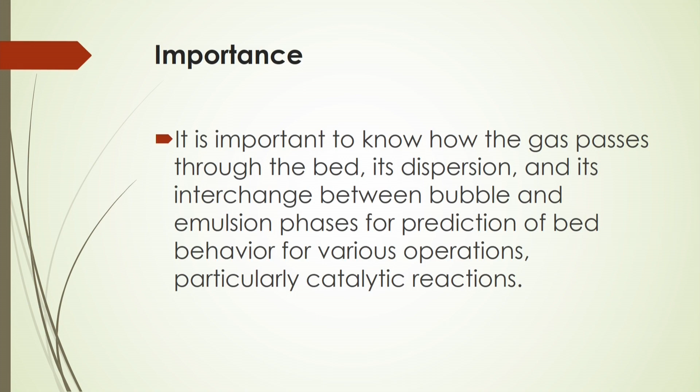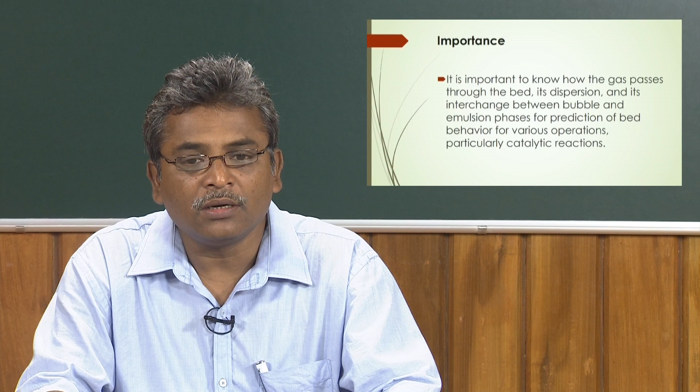So, as gas passes through the bed, its dispersion and its interchange between the bubble and emulsion phases need to be known for predicting bed behavior for various operations, and for the analysis of various catalytic reactions and other selectivity processes.

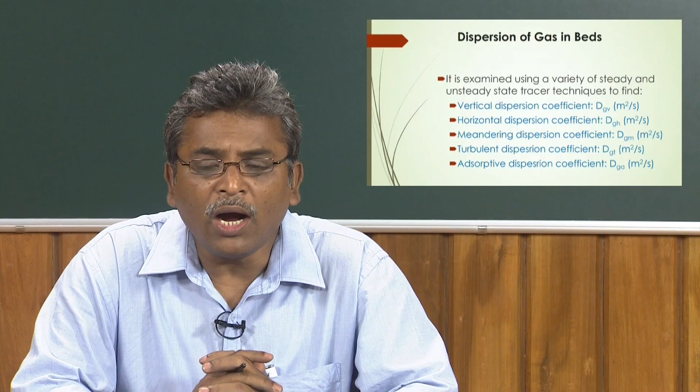Now, whenever we talk about the dispersion of gas in beds, we have to quantify how much dispersion of the gas happens for particular operating conditions. How to estimate that dispersion extent, or you can say the intensity of the dispersion of gas in the bed.

There are different parameters, or rather one parameter divided into different ways to describe gas dispersion. When gas moves straight upward, this dispersion phenomenon is described or quantified by the vertical dispersion coefficient, denoted by dGV in the slides.

And when gas is horizontally dispersing in the fluidized bed due to certain energy distribution, the dispersion coefficient measured for that extent is described by the parameter dGH. Here H denotes horizontal and V denotes vertical.

Also, when there is no other convection inside the bed, or convection effect radially, whenever fluid is flowing through the fluidized bed, there will be a meandering dispersion of the gas inside the bed. This means at the axial location there will be a certain extent of dispersion compared to other parts of the fluidized bed, provided there is no disturbance or other action acting during the flow of that gas.

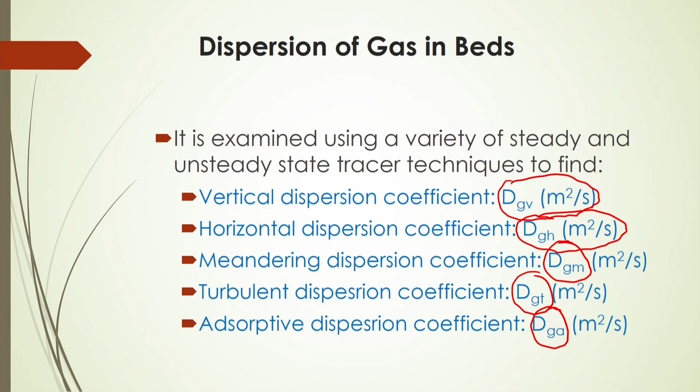Now, that adsorption dispersion will be characterized by the adsorptive dispersion coefficient, denoted by dGA, where A is for adsorption and G is for gas, and capital D represents the dispersion coefficient. So we will examine how vertical, horizontal, meandering, turbulent and adsorptive dispersion coefficients occur inside the bed, and how it can be quantified. This will be discussed in the lecture here.

Now, what is the technical way, or experimental method, by which you can actually quantify or estimate the gas dispersion inside the bed? You will see there are several methods to quantify this dispersion effect inside the bed.

As already discussed in previous lectures, there are tracer techniques by which you can estimate the dispersion phenomena inside the bed. Now, by running steady state gas tracer experiments, what you have to do is use some amount of tracer gas which will not actually take part in the reaction in the bed, and if it is not adsorbed to some extent, then that will be a non-adsorptive condition.

So basically, whenever you are sending any gas which is not reactive with the existing gas being supplied, and if it is used as a tracer gas, then how this tracer gas changes its concentration along the axis at a certain operating condition. Now, if you are measuring this concentration change of that tracer gas with respect to time, then it will be called unsteady state operation.

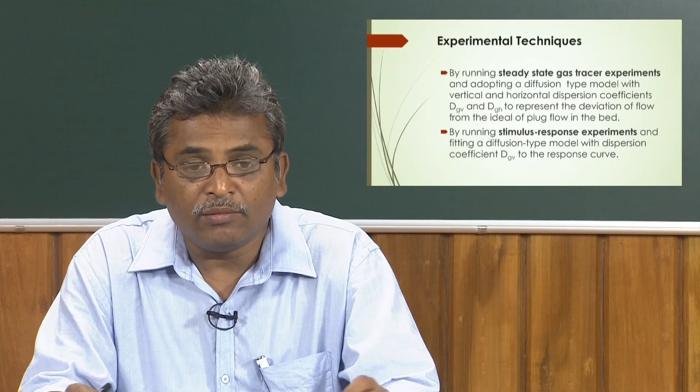So at unsteady state, if you measure the tracer concentration with certain measuring devices and see how it changes with respect to time, and then feed this tracer concentration profile with respect to time into the experimental data, you will see how the dispersion coefficient can be measured or estimated. You have to feed this experimental data of the concentration profile into some fundamental models, and from that model you will be able to calculate the efficiency, or intensity, of the dispersion of gas inside the bed.

Now, steady state gas tracer experiments are more common for estimating this dispersion coefficient in the bed. For this, you have to feed some fundamental model with the experimental data of the tracer gas concentration profile with respect to time. What is that fundamental model? It is actually called the diffusion type model.

This diffusion type model is given in detail in reaction engineering books, in chemical reaction engineering books by Levenspiel, which will be more helpful to study in that way. But we will still see here how to estimate it using the diffusion type model and how it can be utilized to calculate the dispersion coefficient. This diffusion type model uses vertical and horizontal dispersion coefficients, dGV and dGH respectively, to represent the deviation of flow from the ideal plug flow in the bed.

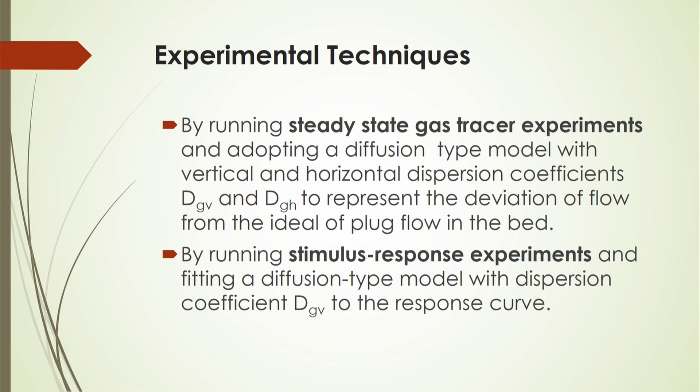So this is one method. Another important method is by running stimulus response experiments and fitting a diffusion type model, which will also give you the extent of dispersion of the gas vertically or horizontally from the response of that stimulus response experiment. Another important method is by injecting tracer bubbles into the bubbling fluidized bed.

You will see this at incipiently fluidized condition, and if there is a loss of tracer from these bubbles, and if you estimate that loss of tracer from the bubbles and find the interchange coefficient of this loss of tracer gas from the bubble to the emulsion gas, then you will be able to calculate the extent of dispersion happening inside the bed.

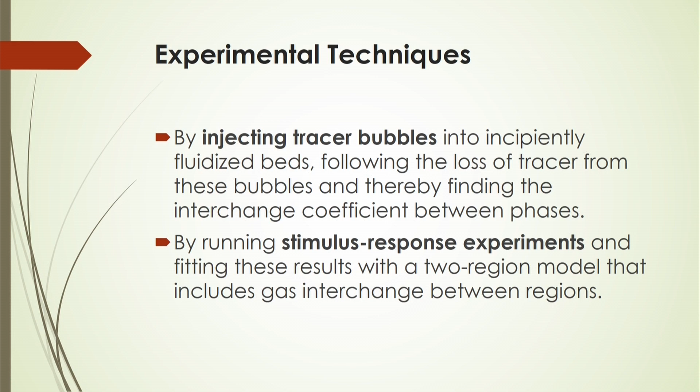Another important method is by injecting some other particle, like a tagged particle, inside the bed, and then tracking how the tagged particle's height changes with respect to gaseous flow from one location to another. Sometimes radioactive tracer particles are also used to calculate the dispersion coefficient or dispersion phenomena inside the bed. In that case, one particle moves from one position to another, and from its mean travel path and time-averaged mean travel path, the dispersion coefficient can be analyzed.

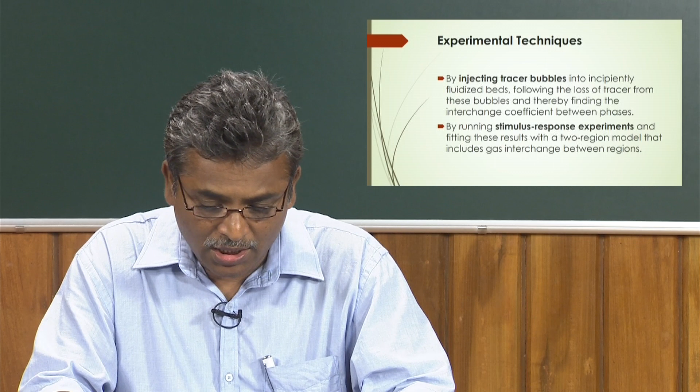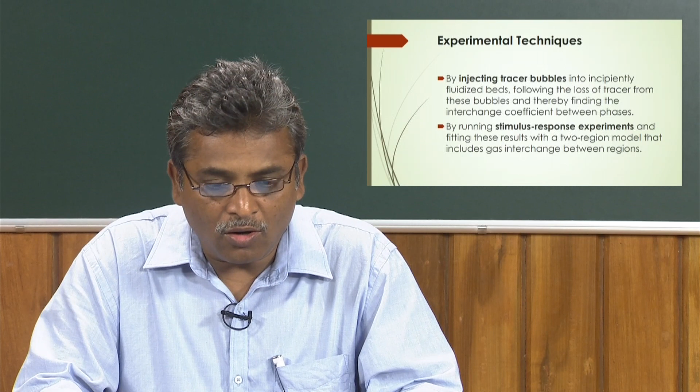Recently, another important aspect is knowing the conductivity of the tracer gases inside the bed using devices like a conductivity meter, measured at different locations of the fluidized bed with respect to time. From the information entropy of the change in concentration of the tracer gas inside the bed, you can calculate the maximum mixedness of the phases inside the bed, and from this you can determine the extent of mixing or dispersion of gases happening inside the bed.

Now let us see one important steady state tracer technique. In this figure we describe a fluidized bed. From the bottom, gas is moving upward, and from the top a tracer gas is allowed in and allowed to mix inside the bed at that particular gas flow rate, with certain gas particles and fluidized particles there.

In this case, you will see the flow of tracer gas at a horizontal plane in the tall fluidized bed, measuring the upstream diffusion of that tracer, from which you will be able to calculate the extent of mixing.

Here, Ca represents the mean concentration of tracer at level Z inside the bed, and Cai is the concentration at the injection plane Zi. This is the Zi at which the tracer concentration is actually noted down. So if Ci is the concentration at the injection plane Zi, when represented by the dispersion model, the differential equation for this vertical dispersion process is represented by equation 1.

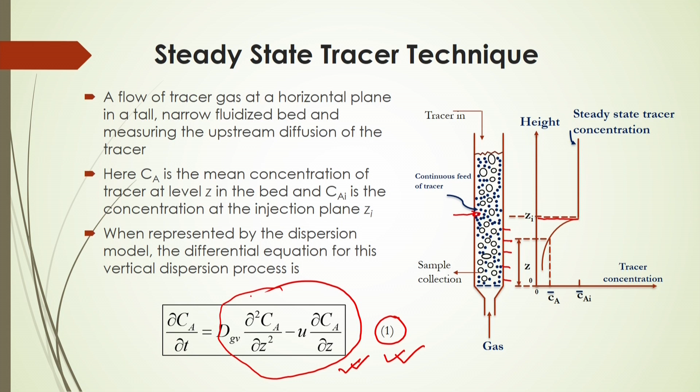Now see here: at steady state of tracer gas at a horizontal plane in a tall narrow fluidized bed, measuring the upstream diffusion of the tracer at different locations, the differential equation for the change of concentration with respect to Z in the vertical direction can be represented by equation 2 at steady state condition.

If you solve equation 2 with a reasonable boundary condition, you will get equation 3, which represents the average concentration at different axial locations.

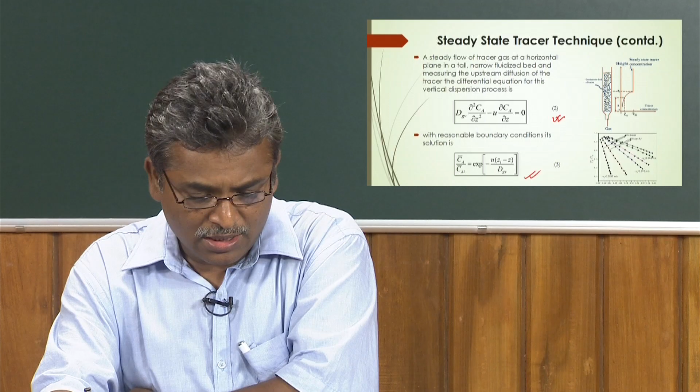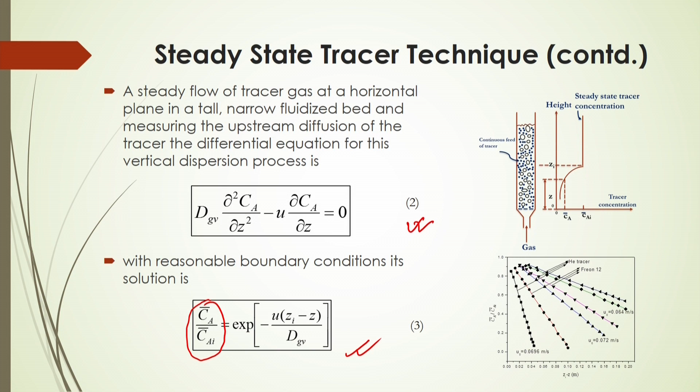So Ca bar by Cai equals the exponent of minus u times (Zi minus Z) divided by Dgv. If you plot this concentration data, taking the ratio of Ca bar by Cai and the logarithm on each hand of this equation, you will see a straight line formation, from which you can calculate Dgv from the slope of this equation.

From observation, Kunii and Levenspiel gave results from their experimental observation for vertical dispersion coefficient. This dispersion coefficient is seen to vary with respect to u, meaning whenever you increase the gas velocity inside the bed, the dispersion coefficient will increase.

It is seen that for different particle sizes, Dgv also changes, meaning this vertical dispersion coefficient is a function of particle diameter. They did their experiments with different tracer particles and different particle types, using freon gas or helium gas as the tracer gas.

When using helium gas with particle diameter of 150 micrometers, they got this profile, showing that the dispersion coefficient in the vertical direction increases with increasing gas velocity. But when the same helium concentration is used with particle size reduced to 60 micrometers, they got a higher dispersion coefficient compared to the 150 micrometer particle diameter.

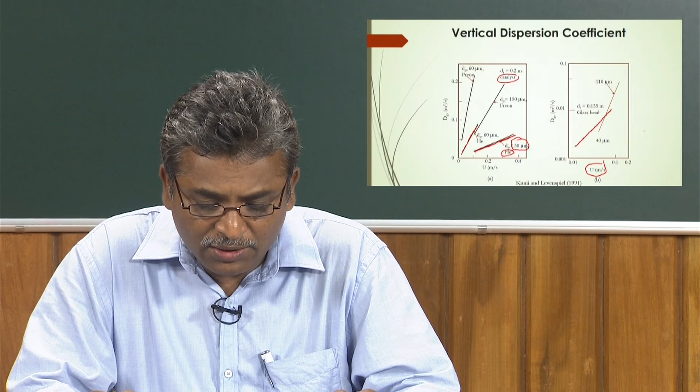It is also important to note that the tube diameter, or bed diameter, of the fluidized bed also has an intense effect on the fluidized bed gas dispersion. What happens if we increase the tube diameter? Suppose if I use 0.2 meter instead of 0.135 meter, it is seen that for the same tracer gas and same type of particles, the dispersion will increase.

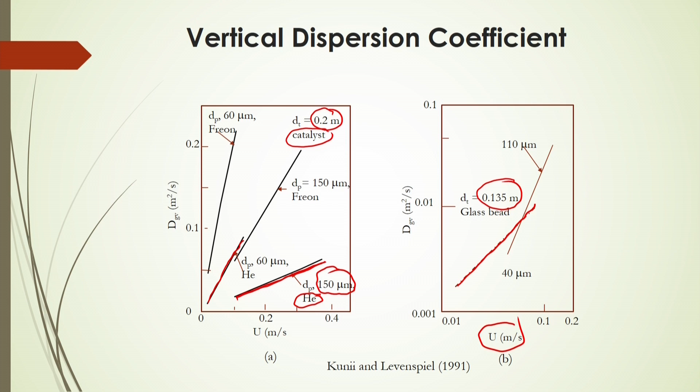Why? Because for the larger diameter bed, there will be more space, so the radial distribution of the gaseous particles as well as solid particles will be more relative to the smaller diameter tube. There, more internal circulation, that is the intercirculation cell of solid particles, will be more compared to the narrow tube. So residence time will also be more, because of which the dispersion coefficient of gaseous particles inside the bed will increase.

Another important concept is the horizontal dispersion coefficient. What is the horizontal dispersion coefficient? That means you will see that near the distributor, the gas will not immediately go to the upper position of the fluidized bed.

Very near to the distributor, high kinetic energy distribution will enhance the distribution not only in the vertical direction, but there may also be a tendency for solid particles or gaseous particles to move radially or laterally in the bed.

Also, if the bed diameter is high, then from the bottom part of the fluidized bed near the distributor, due to higher kinetic energy, ejection of solid particles may change the axial velocity profile of the gas toward the radial position. So radially there will be a spread of solid particles or gaseous particles, by which horizontal dispersion may result from the high kinetic energy distribution at the bottom side near the distributor.

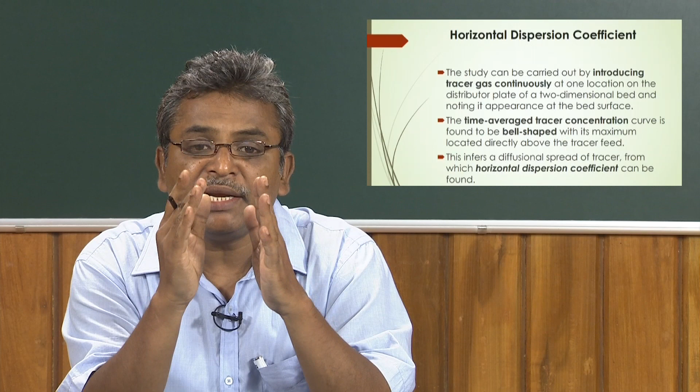Whereas at the top side, you will see there may be a reduction of lateral dispersion, because the very fine particles coming up due to entrainment and segregation phenomena may not move downward and spread radially as intensely as in the lower part. In that case, the kinetic energy or streamline of particles coming out from the bubble position, that is the bubble head, may not eject as much solid from outside, but will move up horizontally because of those finer particles.

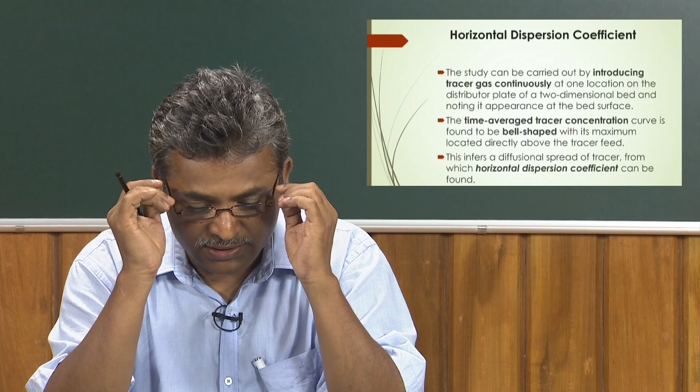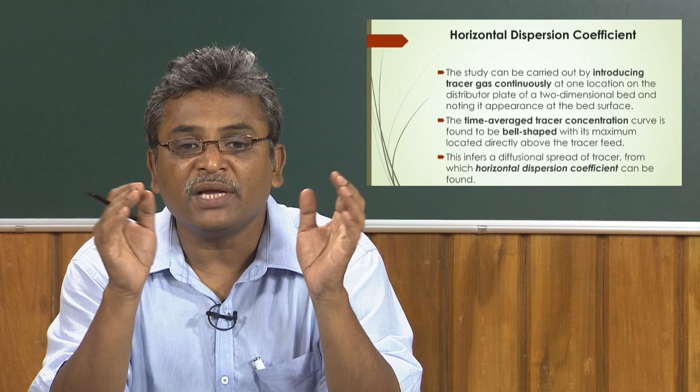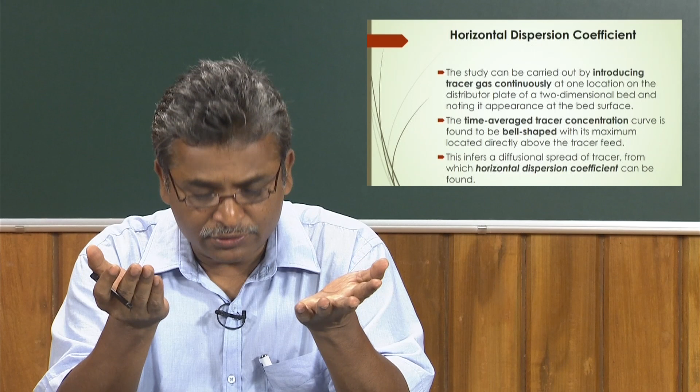So, if there is a mixture of larger and smaller particles, there may be a tendency for the coarser particles to come out downward at the upper position. They may change the velocity pattern of the gas flow rate at the top position, and because of this the dispersion of the gases will change its trends.

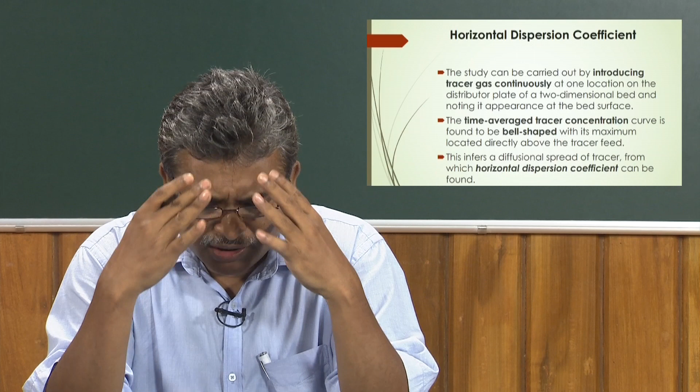Another important factor: whenever we measure or estimate the horizontal dispersion coefficient, we introduce the tracer gas continuously in the bed at one location on the distributor plate of a two-dimensional bed, and note its appearance at the bed surface. The time-averaged tracer concentration curve is found, with a maximum located directly above the tracer feed, and the time-averaged tracer concentration looks like a bell-shaped trend. This interprets the diffusional spread of the tracer, from which you can determine the horizontal dispersion coefficient.

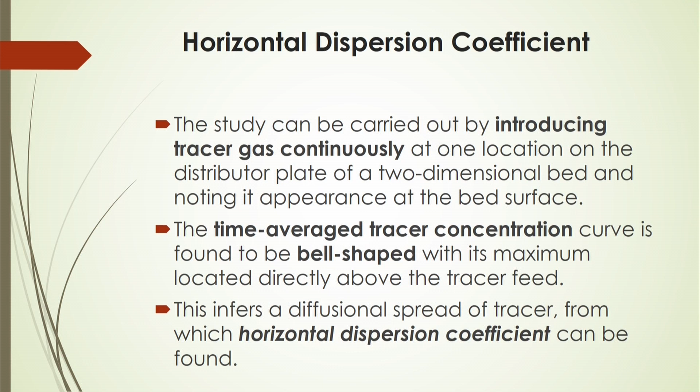Some results given by Kunii and Levenspiel for horizontal dispersion coefficient used horizontal tube arrays for enhancing this dispersion coefficient, and they measured the quantity of the dispersion coefficient. They found that with increasing gas velocity, initially up to 0.02 meter per second, the horizontal dispersion coefficient does not change significantly, whereas above 0.02 meter per second the dispersion coefficient changes drastically for different air and tracer gas mixtures.

It is seen that for freon tracer the molecular diffusivity is a little lower than the convective diffusion, whereas for the helium tracer the molecular diffusion is much higher than the convective one. So in this case, it depends on the physical properties of the tracer gas, and also whether there are any adsorption characteristics inside the bed.

Another important point: if you increase the gas velocity for a fixed bed with no fluidization condition, there will be no significant change in horizontal dispersion coefficient. Whereas beyond 0.25 meter per second effective gas velocity inside the bed, there will be a change in horizontal dispersion coefficient, and this horizontal dispersion coefficient actually changes as per the particle diameter.

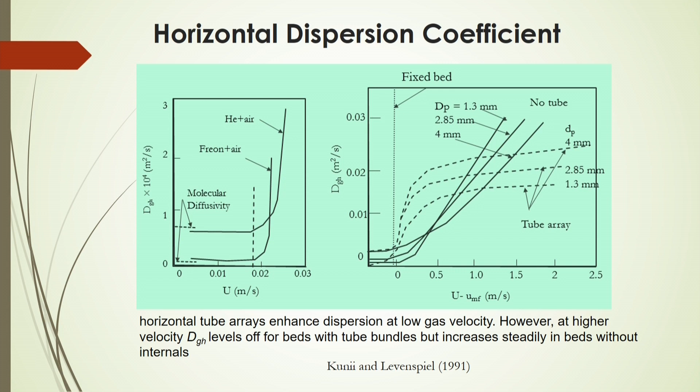So you cannot express this haphazard behavior of concentration change by a standard, simple diffusion theory. So for this, some phenomena need to be introduced to explain how this type of behavior can occur.

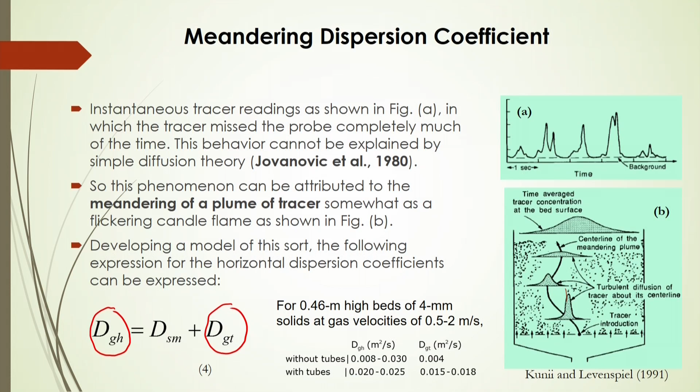In the absence of bed internals, the meandering plume is the main mechanism for horizontal spread of gas. You can reduce that horizontal spread of gas by inserting some tube vertically, or you can use a baffle, or some other provision, so that you can decrease the horizontal dispersion coefficient.

We have already discussed something about making a shroud, by which you can decrease the attrition mechanism, and in the same way you can also reduce the horizontal dispersion coefficient in the bed.

In the bed with tube bundles, actual turbulent mixing will be dominant, because there will be some interaction of the solid particles in presence of the tube bundles that will enhance it.

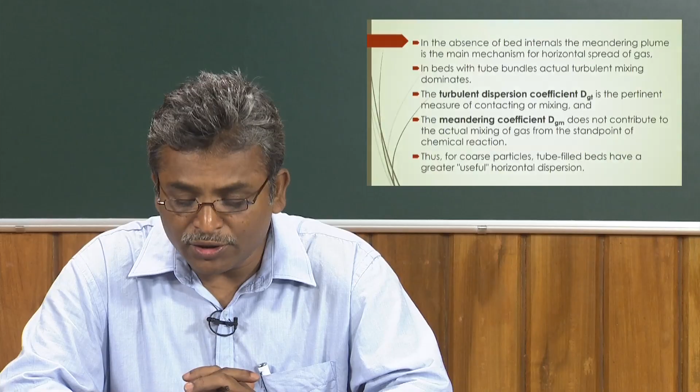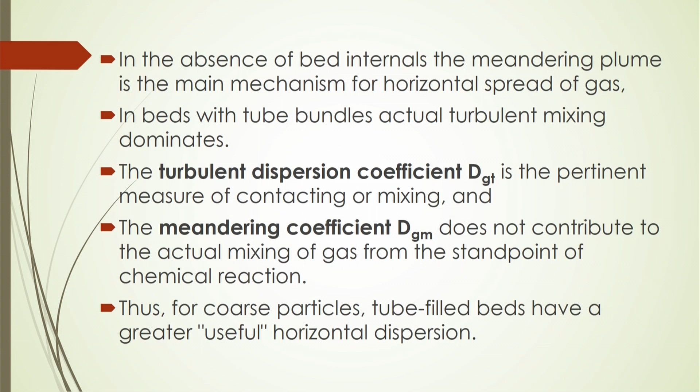The turbulent dispersion coefficient DGT is the pertinent measure of the contacting or mixing inside the bed, whereas this meandering coefficient will not contribute much to the actual mixing of the gas from the standpoint of chemical reaction. Thus, for higher diameter particles, tube-filled beds have greater useful horizontal dispersion in the bed.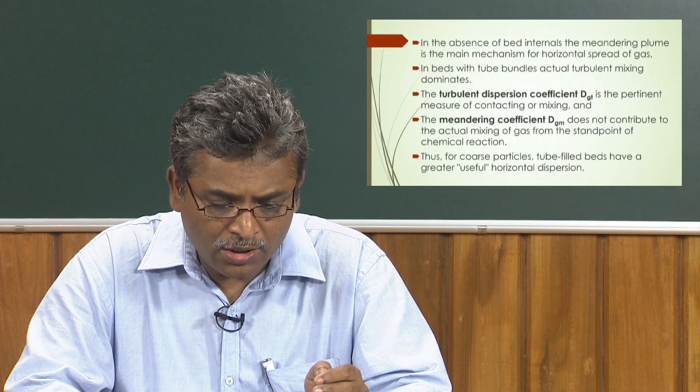There are different methods of estimation of gas dispersion that we told about. So, we have discussed one method, and then another method is called the stimulus response method of gas dispersion.

The stimulus response technique has been used extensively to explore the flow behavior of the gas in the fluidized bed. Here in this figure you see that sometimes the tracer is introduced inside the bed as a pulse input and as a step input.

As a pulse input, within as short a period of time as possible, you have to insert the tracer gas in the bed, and immediately you have to collect the sample, or by online measurement you can measure how the concentration of the tracer gas will change with respect to time.

Once you know the concentration of the tracer gas with respect to time, you may expect this type of profile, shown here in this figure.

Also for step input, what happens is you have to insert the tracer gas within a certain interval of time continuously in the bed, and you will see this type of trace - the distribution function of the tracer inside the bed observed with respect to time.

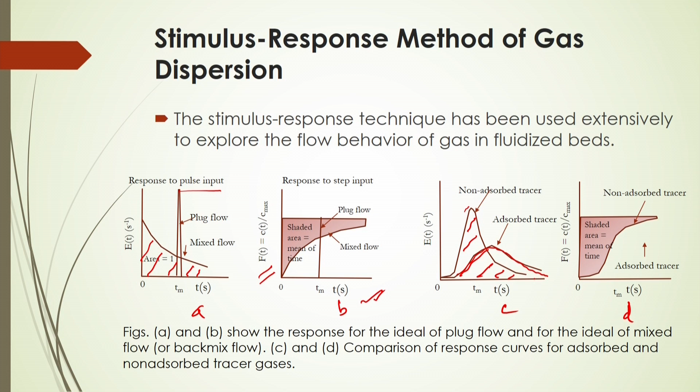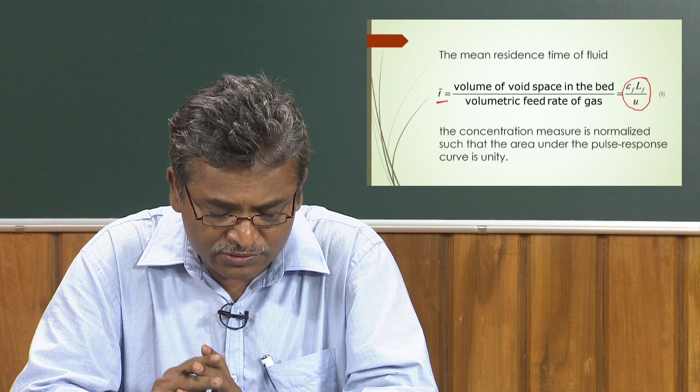So the concentration measure is normalized to represent the profile or distribution of the tracer concentration with respect to time. After measurements, when you plot it, you get a profile like this, and you can measure the area under that curve from the graph, or calculate it theoretically using the one-third rule or other integration techniques. Once you know the area under the curve, you can calculate the mean residence time in the bed.

Now, what is the relationship between ET and FT? ET is the concentration function here, the normalized concentration function. These normalized curves are called the ET curve for the pulse response and the FT curve for the step response. At any time after introduction of the tracer, ET and FT are interrelated by this equation: dFT by dt equals ET, or the integration of ET from 0 to t.

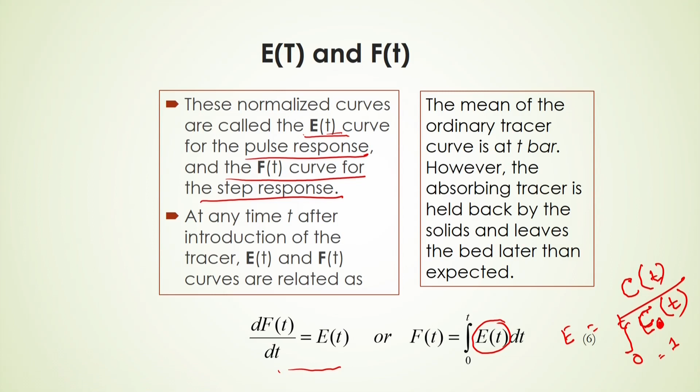Once you know the ET curve, observing that trend, and fitting it with the experimental data using the standard diffusion model, you will be able to calculate the dispersion coefficient.

Now, if the extent of adsorption is represented by an equilibrium constant, and if you use some tracer gas that is being adsorbed by the particles used in the fluidized bed, then you have to consider those adsorption phenomena also. At equilibrium condition, the equilibrium parameter for that adsorbed gas inside the bed is represented by m. M is defined as the concentration of tracer in the solid divided by the concentration of tracer in the gas, by this equation 7.

Then for a bed of adsorbing solids, T bar, the mean residence time, will be less than or equal to the measured T, which will be less than or equal to 1 plus m into T bar. What does this mean? Whenever adsorption is present, there will be more time for dispersion of the gas inside the bed.

Also, if equilibrium is rapidly established, then the measured mean residence time will be equal to the adsorbed phase mean residence time. This happens because when equilibrium is rapid, it will not take much time to adsorb the gas, while dispersion takes more time. So the adsorption contact time becomes relatively very small compared to the total mean residence time or average residence time inside the bed.

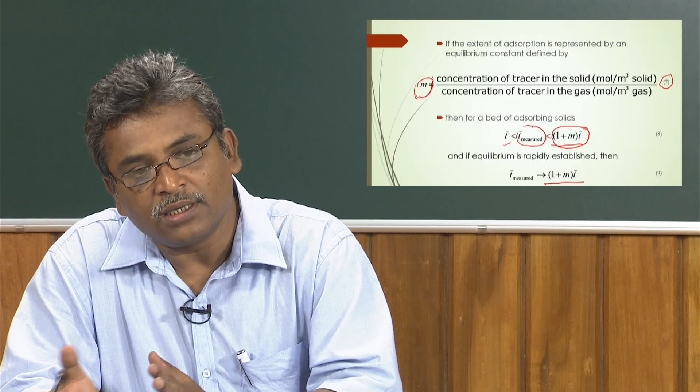If the adsorption takes place within a very short residence time, or very rapidly, if equilibrium of the adsorption happens, then the measured mean residence time will be exactly that mean residence time for the adsorption condition.

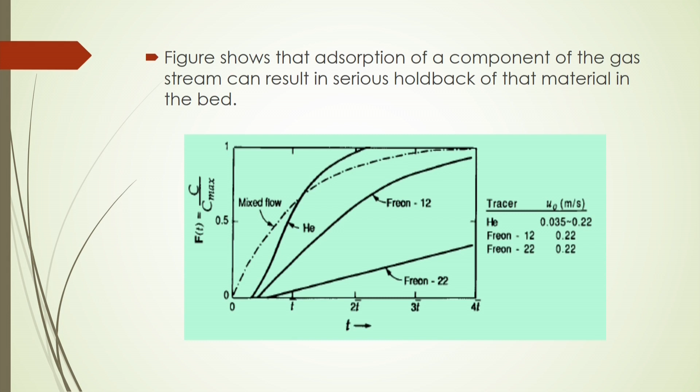Now, the one dimensional diffusion type model very often reasonably represents the flow characteristics of the fluid inside a unit of fluid flow. If you are considering one dimensional diffusion model for a fluidized bed that is narrow, with diameter not more than 5 centimeters, you can easily use that one dimensional diffusion model because the radial distribution will not be that much effective compared to the axial dispersion coefficient.

So in that case, the one dimensional diffusion type model reasonably gives good results to represent the dispersion phenomena inside the bed, and this one dimensional model is widely used for calculating or estimating the dispersion coefficient of the fluid medium inside the bed.

So what is that one dimensional dispersion model? This is the final form of the equation, derived from material balance. The material balance details are not given in this lecture, but this final equation you can get in any standard reaction engineering book. I am just giving you two books, Levenspiel and Fogler.

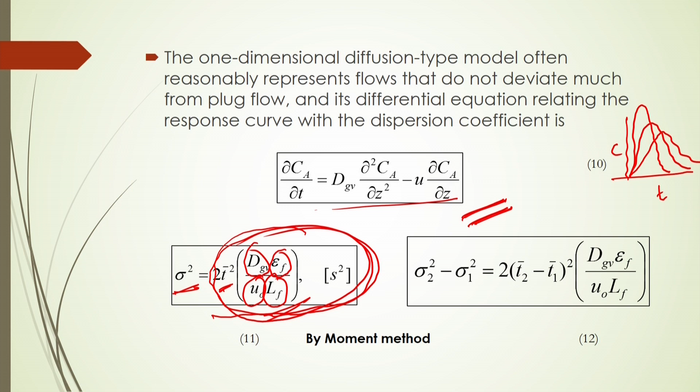What is u0? U0 is the gas velocity at which the fluidized bed is being operated, and T bar is the mean residence time obtained from the first moment of this equation. Sigma square can be calculated from this moment method. Once you know the concentration, you will be able to calculate the variance, and from this variance, the dispersion coefficient can easily be calculated.

Now for gaseous components that can be adsorbed by the bed solids, the vertical dispersion of the tracer gas should also include the material carried about the bed by these solids. An equilibrium existed between gas and solid at all positions in the bed, which gave the following expression to account for adsorbed gases.

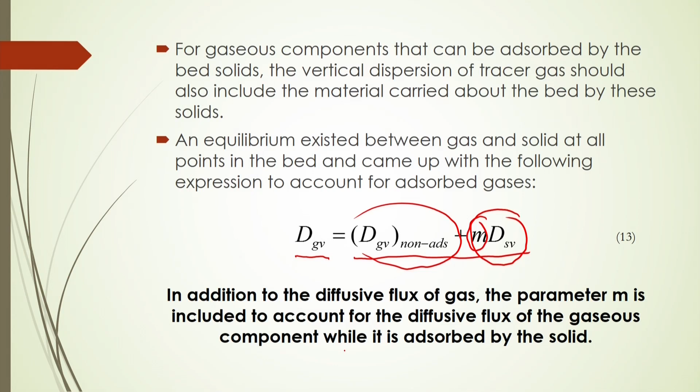So this dGv can be expressed in terms of the dispersion coefficient of the non-adsorbed condition and the dispersion coefficient of the vertical dispersed solids, and if you multiply it by the adsorption equilibrium, you get the vertical dispersion coefficient of gas in the bed. In addition to the diffusive flux of gas, the parameter m is included to account for the diffusive flux of the gaseous component while it is adsorbed by the solid.

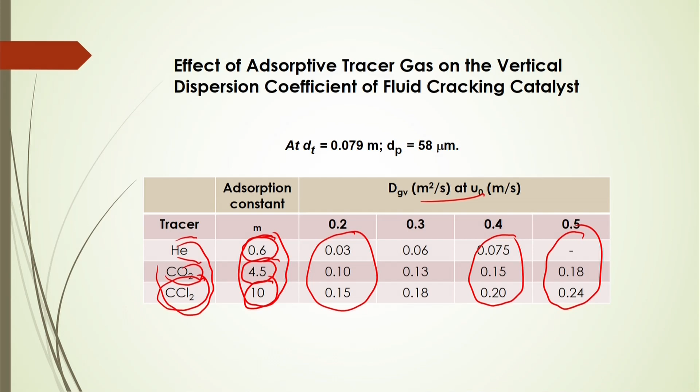So in that way, for different m values you will see how dGV changes, as given in this table. This dGV will change accordingly with respect to the equilibrium parameter of the adsorption of the gas. Now, another important factor is called the gas interchange.

It is seen that for slow cloudless bubbles, gas flows directly from the main body of the emulsion into the bubble and then back again into the emulsion. So in a fast clouded bubble in the bubbling fluidized bed, the tracer exchange occurs between bubble and cloud, and also within the cloud and emulsion. As per this figure, surrounding these bubbles there will be the cloud and emulsion, as already discussed in the bubbling fluidized bed phenomena.

So we know that there will be a cloud region, that cloud radius, and also the bubble radius, and then emulsion surface, cloud surface — all these things we have already discussed earlier. So this driving force for the interchange between bubble, cloud and emulsion will be called the concentration difference, that is delta C.

Now, if material A is removed from a bubble of volume VB, the rate equation can be expressed by equation 14. In this case, the number of moles of tracer gas changing in the bubble with respect to time will be depending on the bubble velocity as well as the concentration of the tracer gas in the bubble, and it will be proportional to the driving force of that concentration difference, CAB minus CAE, that means between bubble and emulsion.

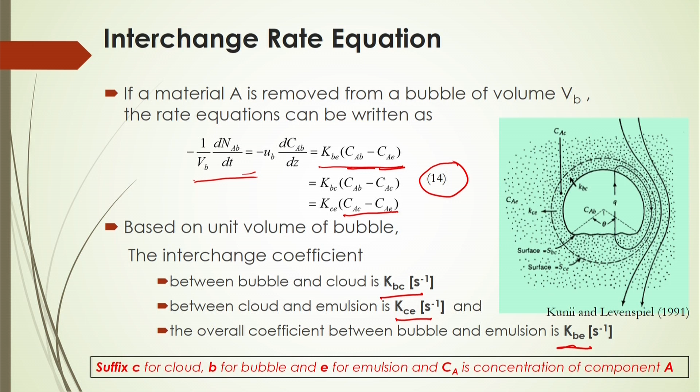And you will see that the overall transfer coefficient, that is capital KBE, can be obtained from the individual transfer coefficients KCE and KBC. So in this case, 1 by KBE will be equal to 1 by KBC plus 1 by KCE.

Once you know this KCE and KBC, then it is easy to calculate the overall transfer coefficient directly from bubble to emulsion. So whenever transfer is coming from bubble to emulsion, two zones should actually be crossed: one is the BC zone and another is the CE zone. That is why the overall transfer coefficient from bubble to emulsion will be calculated as per equation 15.

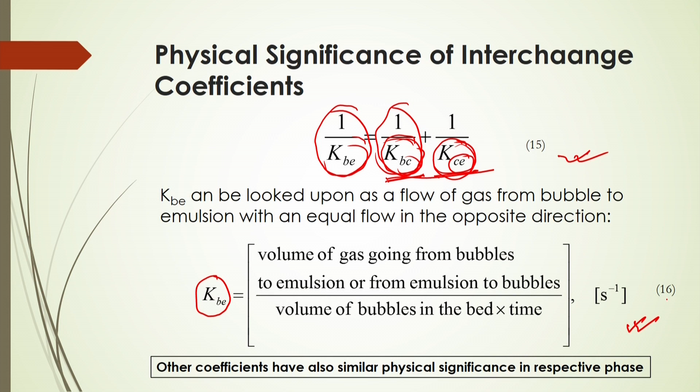Now, this KBE can be looked upon as the flow of gas from bubble to emulsion with an equal flow in the opposite direction also. So this can be defined physically as the volume of gas going from bubbles to emulsion or from emulsion to bubbles, per volume of bubbles in the bed, per unit time. So in this case its unit comes out to second inverse. Other coefficients also have similar physical significance with respect to the phase.

Now, mass transfer coefficient from bubble to the dense region will be represented by small kbe. There it is the transfer coefficient, here mass transfer coefficient. So this one will be discussed later on in details. In this case, if there is a net flux of tracer A from a bubble of volume VB and surface SBE, then the net flux can be expressed by equation 17.

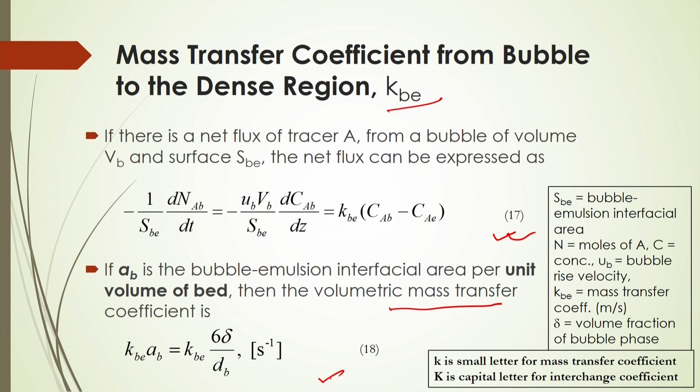If AB is the bubble emulsion interfacial area per unit volume of bed, then volumetric mass transfer coefficients can be represented by equation 18. There is also an interrelationship between the transfer coefficient of this mass transfer and the interchange coefficient.

Comparing equation 14 and 17, you get equation 19 for the relationship between KBE, the overall transfer coefficient between bubble and emulsion, and the mass transfer coefficient of bubble to emulsion, once you know the interfacial area between bubble and emulsion.

So this KBE will be equal to small kBE into SBE by VB. Now this SBE by VB will be equal to 6 by dB. This is easy to derive, what is the surface area and what is the volume. Just substitute and you will get 6 by dB.

What is delta here? Delta is nothing but the volume fraction of the bubble in the bed.

For vigorously bubbling beds, the interchange coefficient between bubble and emulsion will be equal to small KBE into AB into UB by UF. This UB is the bubble rise velocity, whereas UF is the fluid velocity.

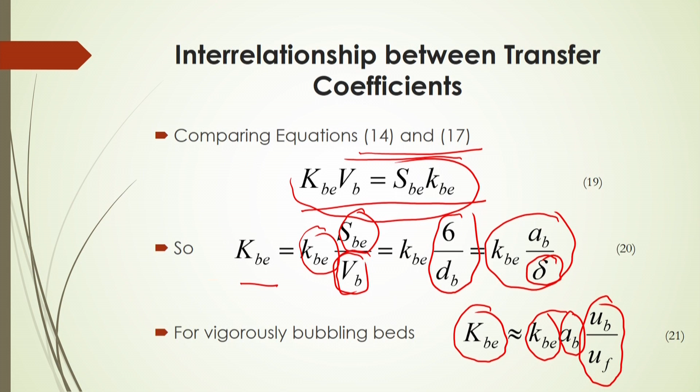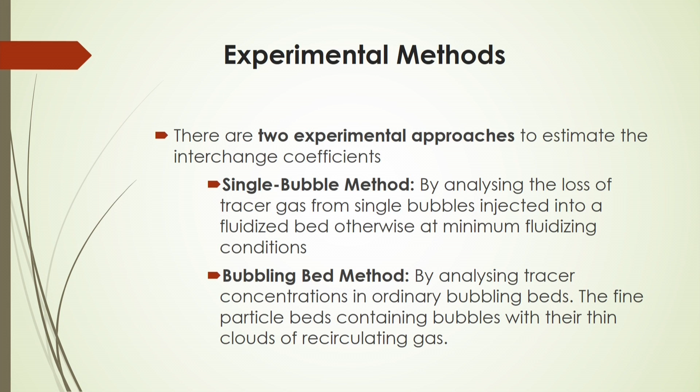You can also get this interchange coefficient by experimental methods. There is the single bubble method and bubbling bed method, from which you will be able to calculate that interchange coefficient. As per the single bubble method, consider a single clouded bubble.

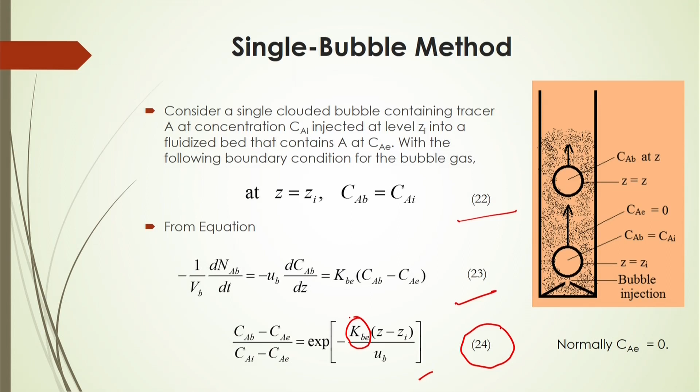So from equation 24, once you know the concentration at different phases, you will be able to calculate the coefficient KBE, that means the interchange coefficient for bubble to emulsion.

Similarly, the bubbling bed method can also be employed to estimate the bubble gas interchange coefficient. In this case you use the pulse or step response tracer technique for this two region model, and after mass balance you get the differential equation from which you calculate the dispersion coefficient and the exchange coefficient.

The differential equation represents the movement of the tracer introduced uniformly across the bottom of the bed, considering the two regions: bubbling and emulsion region. Based on this you see how concentration changes with respect to time and also across the axis of the bed, represented by equations 25 and 26.

This u should be the effective velocity, which depends on the bubble rise velocity and the emulsion velocity. So the effective velocity will be equal to the fraction of the bubble inside here.

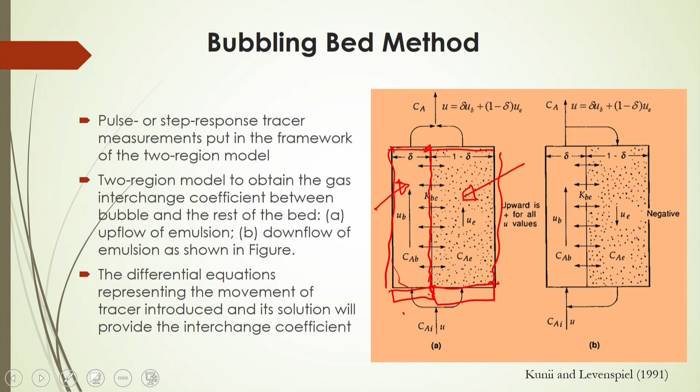In this figure, this portion represents the total fluidized bed, divided into two parts: one is bubbling, where there is no particle, and the other is the emulsion region, where gas and particles are mixed. These two regions: this one is called delta, and the other is called 1 minus delta. So delta is the bubble fraction and 1 minus delta is the emulsion fraction.

Based on this bubble fraction and emulsion volume fraction, you get the effective velocity by which solid particles will be transferred, and also the flow pattern of the gas inside the bed will change.

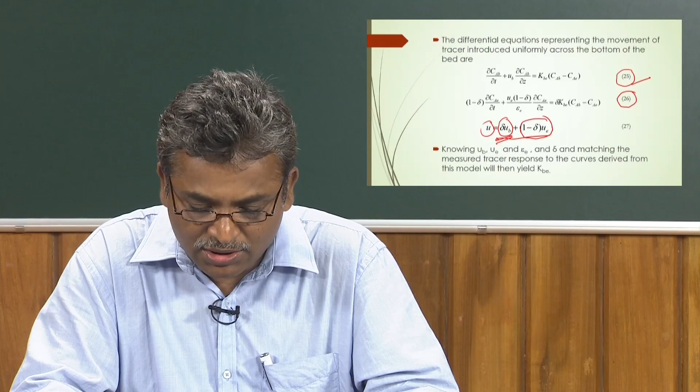Because of this two region change of concentration of tracer particles, you can represent this change based on the two regions by exchange of gaseous particles from one region to another, represented by equations 25 and 26 through mass balance.

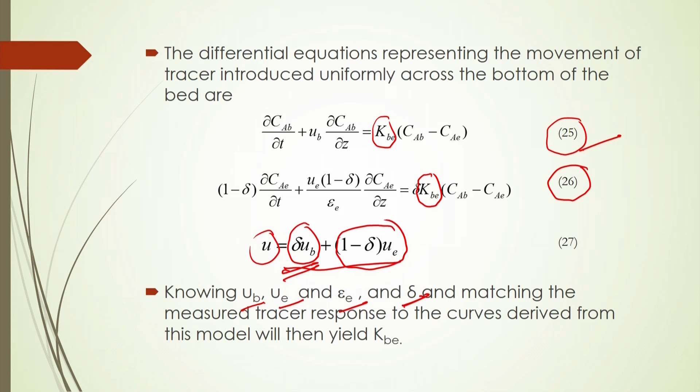After solving these two equations, you will be able to calculate the interchange coefficient represented by capital KBE. Knowing the bubble rise velocity, emulsion velocity, the porosity for emulsion, and the bubble volume fraction inside the bed, and matching these equations with the tracer response as per experiment, then fitting with that model, you get this interchange coefficient of bubble to emulsion.

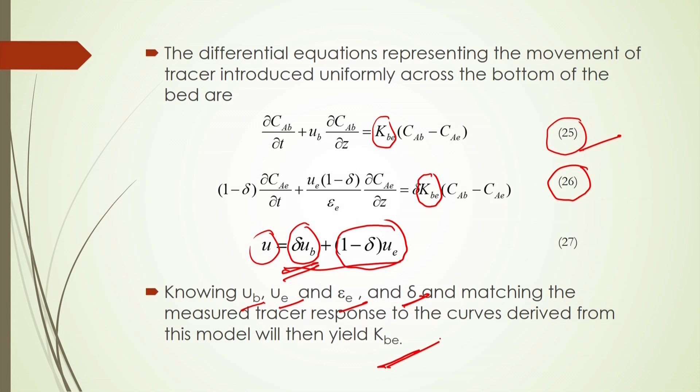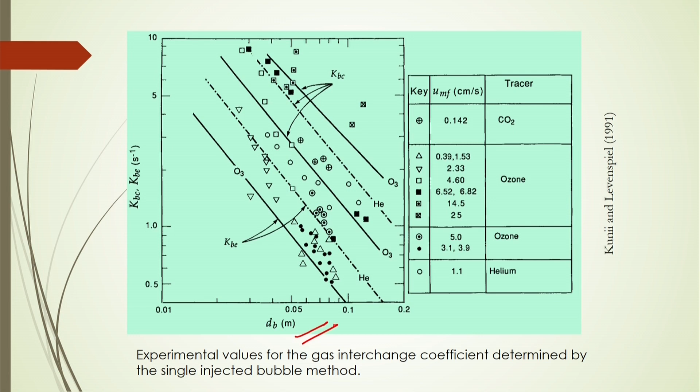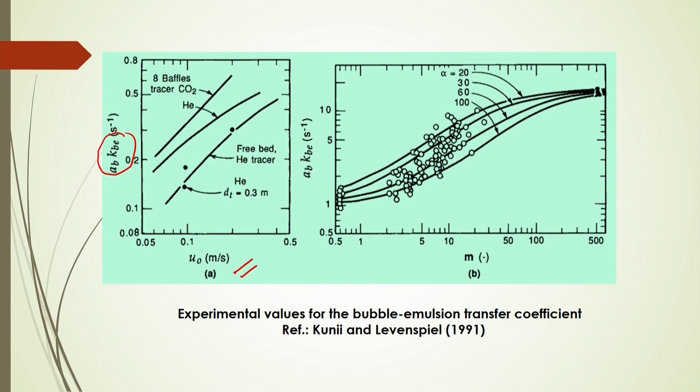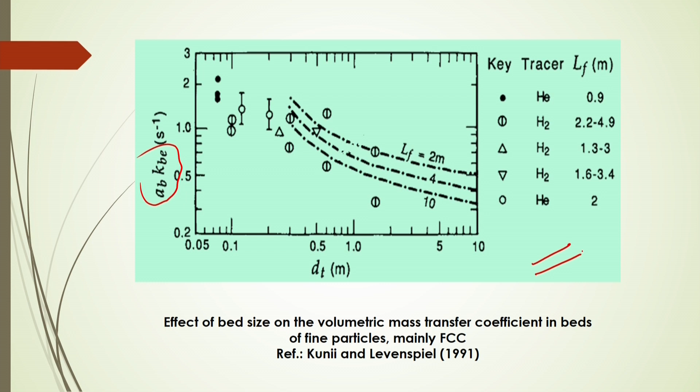The overall mass transfer coefficient, small KBE, also changes with respect to gas velocity and the equilibrium constant of gas adsorption. It also changes with respect to tube diameter, and for this FCC catalyst, Kunii and Levenspiel have given data for how this overall mass transfer coefficient changes with tube diameter.

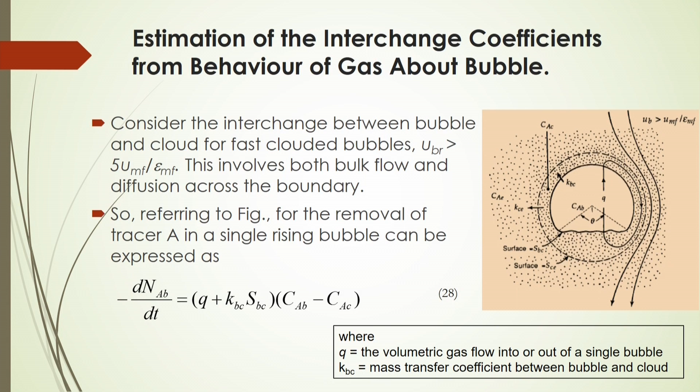Estimation of the interchange coefficient from the behavior of gas about the bubble can be calculated from equation 28. From the Davidson model, we have discussed how particles or gas flow over the bubble, considering the bubble has a cap of theta with theta 100 degrees, and using the penetration model, the mass transfer coefficient between bubble and cloud can be written by equation 30.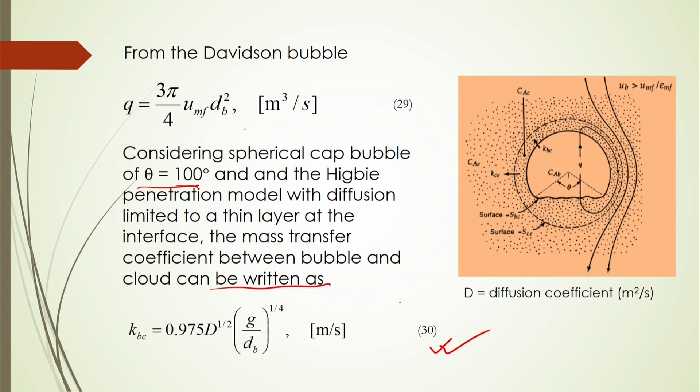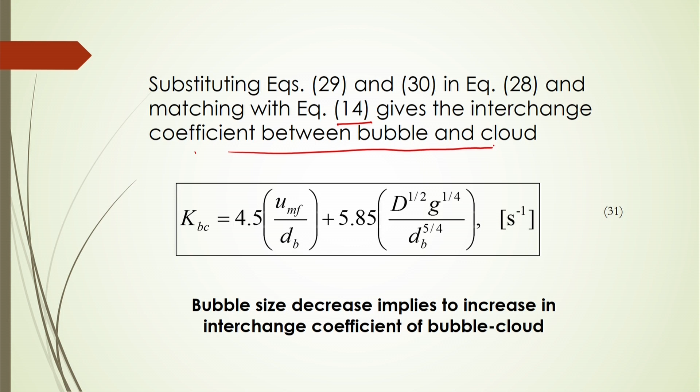Substitution of equation 29 into equation 30, and with the help of equations 29 and 30 in equation 28, matching with equation 14, you can calculate the interchange coefficient between bubble and cloud by equation 31.

Again, if you consider no flow of gas between cloud and emulsion where diffusion is the only acting mechanism for tracer gas transfer between this region, equation 32 can be expressed for that. In that case, KCE, the mass transfer coefficient between cloud and emulsion, will be represented by considering elements of the interface moving from top to bottom of the bubble.

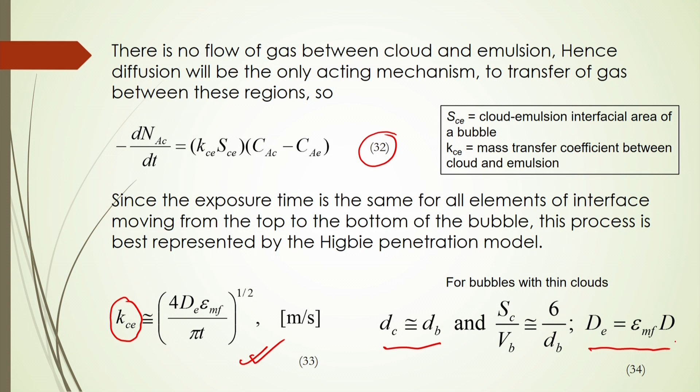For the bubble with thin clouds, you can consider dc equal to dB, and from which the effective diffusivity equals epsilon mf into D. The exposure time of an element of bubble surface is represented by T, equal to dB by UBR. Once you know this exposure time, substitution of equations 35 and 34 into 33, matching with equation 20, gives the interchange or transfer coefficient between cloud and emulsion, represented by equation 36.

Once you know capital KCE from equation 36 and capital KBC from equation 31, after substitution of 31 and 36 in this equation, you get the overall transfer coefficient between bubble and emulsion.

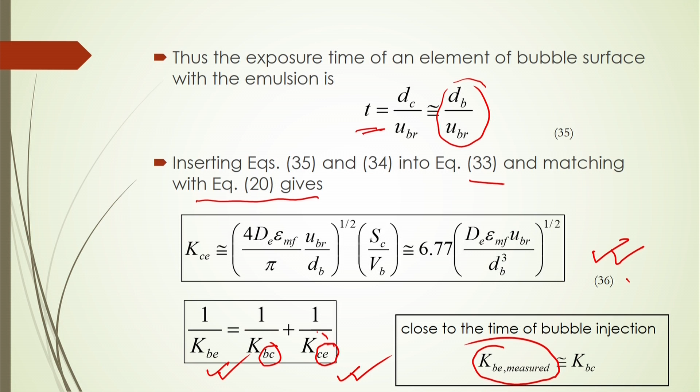It is seen that close to the time of bubble injection, the overall coefficient of bubble to emulsion will be equal to KBC. There will be no effect of the cloud to emulsion coefficient or interchange inside the bed.

Now here is an example to calculate this mass transfer or interchange coefficient. Once you know KBC and KCE, as per this example: an experiment was carried out in a fluidized bed with ozone tracer at the following operating conditions. Based on the experimental data, calculate the interchange coefficient, that is KBC and KCE.

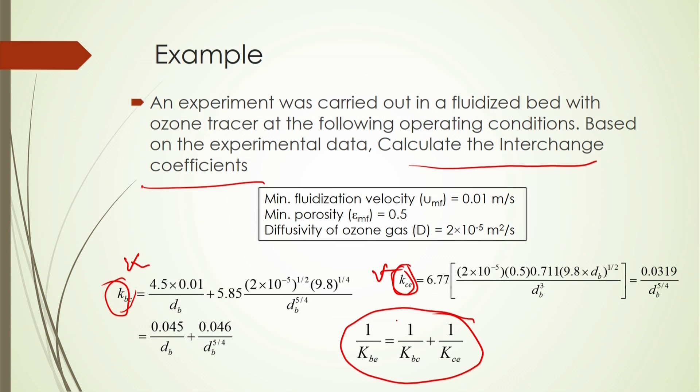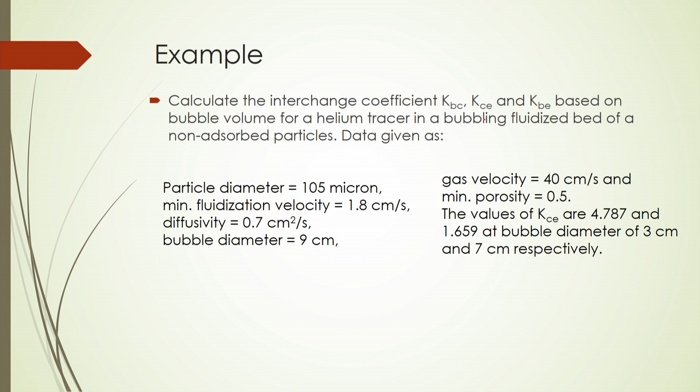This will be correction, that is capital KBC and capital KCE. Once you know this, then what will be the overall bubble emulsion interchange coefficient. Similarly, another example requires calculating KBE. Once you know KBC and KCE with these operating conditions, just simple calculation gives KBE equal to 1.866, KBC equal to 0.833, and KCE equal to 1.21.

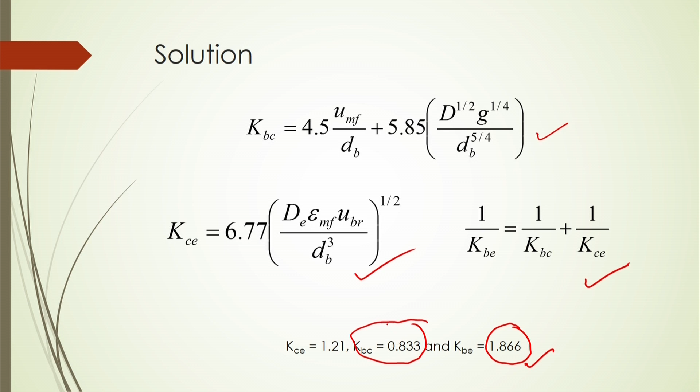So what will be the interchange coefficient you can get? More information about this interchange coefficient and gas mixing inside the bed, how it depends on particle diameter, and also horizontal and vertical dispersion coefficient of the gas affected by the interchange coefficient, and also solid distribution, segregation, mixing effect, and how to estimate the dispersion coefficient by tracer techniques. We have to a certain extent learned about these phenomena of gas dispersion and mixing inside the bed.

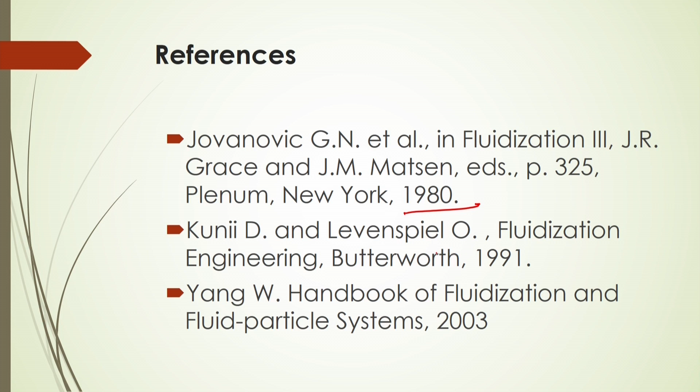More information about this mixing you can get from the Jovanovic book, and also from Kunii, Levenspiel and Yang textbooks from these references.